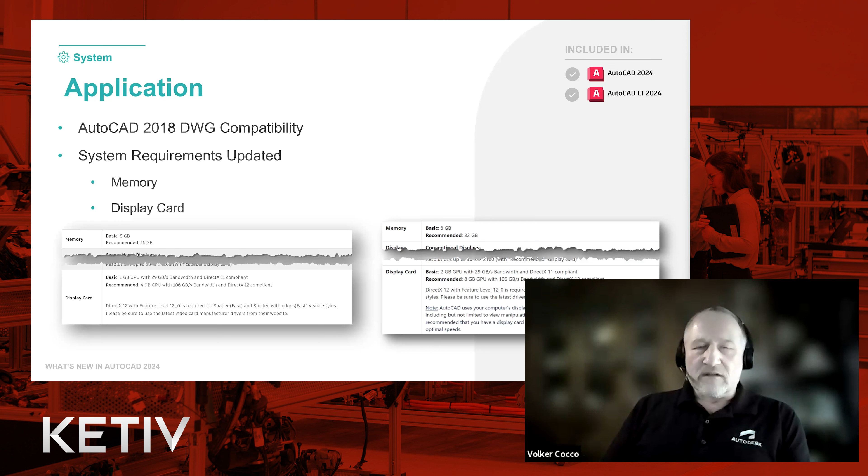We did make some changes to the system requirements. I'm not going to spend too much time going over the details, but I'd encourage you to take a look, as we've left the basics for memory the same, but we've upped the recommendations for memory to be more realistic and provide a better experience with AutoCAD. 8 gigabytes of memory is not that much, and realistically most customers have quite a bit more anyway.

The graphics recommendations have been upped as well, and I'd encourage you to take a look at that. One reason is many newer systems come with an integrated card, and many of those share 8 to 16 gigabytes of system RAM rather than VRAM. AutoCAD, your system, and other applications all have to make use of that memory. So we now put a blurb in the system requirements letting you know that if you have a discrete card on a system with dual cards, you should use that discrete card to power AutoCAD's graphics, since VRAM gives you optimal performance.

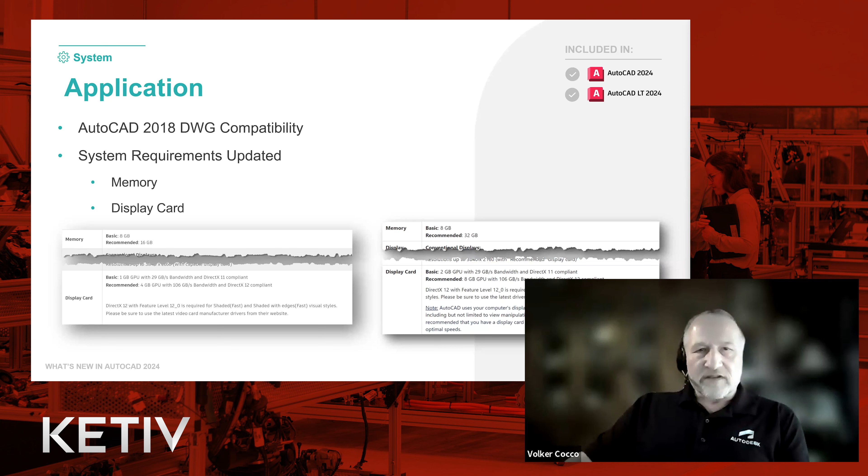Probably one of the biggest system changes is that the AutoCAD for Mac applications and AutoCAD LT now run and are supported on the M series chip. This provides a twofold improvement in performance. Be aware, though, results are going to vary based on the user, their experience, the machine operating system, filters in the drawing files, and even the source material. So performance is improved, but results may vary.

Another change you'll see is that the Autodesk desktop application was replaced back in mid-February by Autodesk Access. When you install AutoCAD, if you still have the desktop application installed, Autodesk Access will uninstall that desktop application, then install the Autodesk Access application.

Next, we've introduced AutoLisp in AutoCAD LT. So AutoCAD LT can now leverage the thousands of Lisp routines that have been written, which previously could only be used in AutoCAD and the tool sets. You should all be familiar with AutoLisp as far as the AutoCAD applications go.

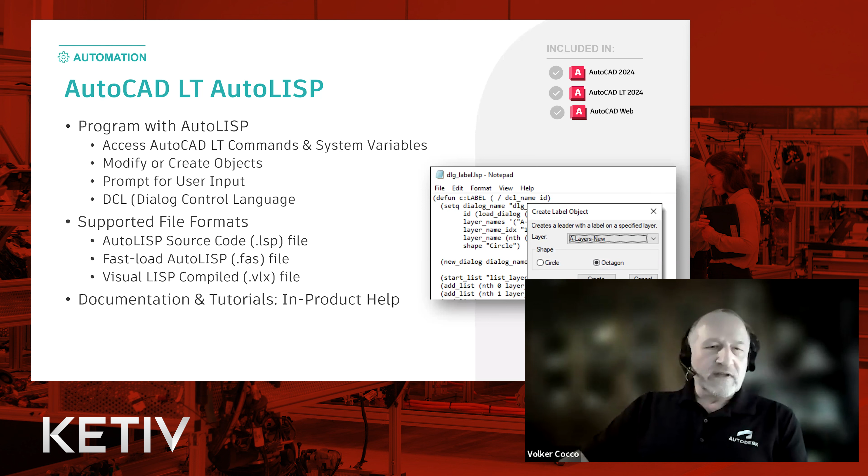There are limitations here. Also, LT on Mac OS does not yet support AutoLisp, and the integrated Visual Lisp editor is also not available in AutoCAD LT. Recently we replaced the old Visual Lisp IDE with the Visual Studio Code environment. Even though it's not integrated with LT, keep in mind you can install that if you want to write code or tweak existing code, and use that environment to do so.

And then you can still load those Lisp routines using the app load command, or through a batch file or acad.lsp file. This should make a lot of people happy, but we'll probably also see a lot of questions regarding AutoLisp as well.

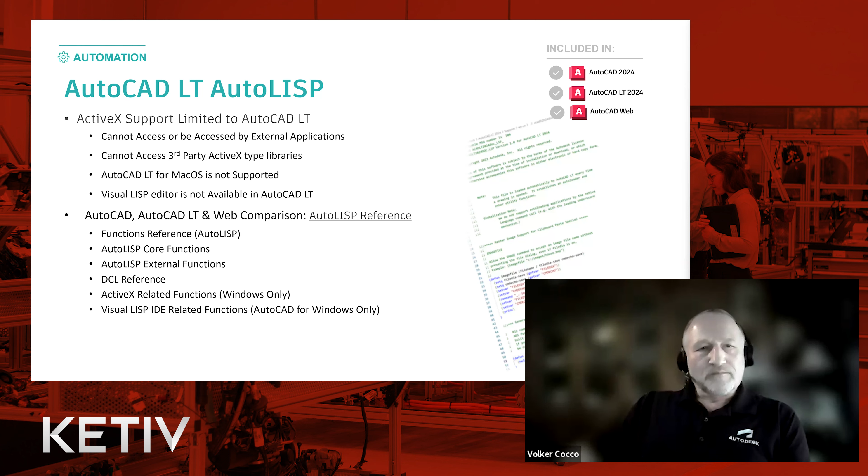Moving on, I'm going to talk about the big features that were introduced. The first few here are enhancements to existing features, and then I'm going to talk about new functionality. I'll go over all of this rather quickly so I can have time to demonstrate some of this functionality for you.

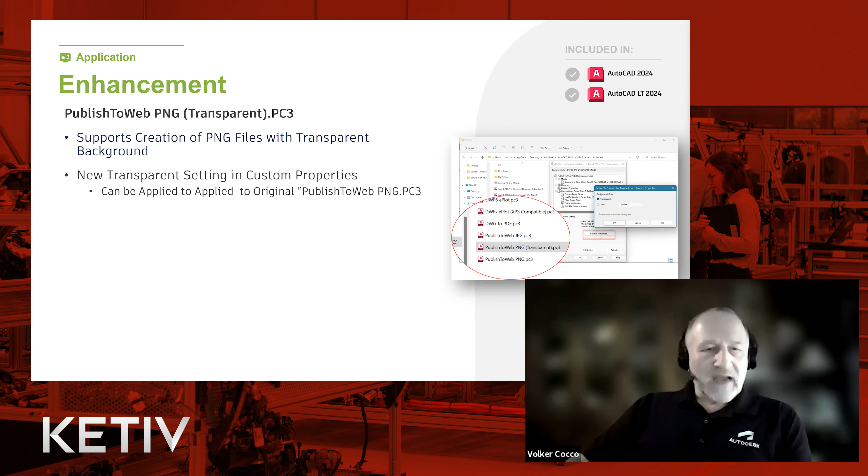First, let's take a look at some behind the scenes enhancements. AutoCAD 2024 adds a new plotter configuration file, the publish to web PNG transparent PC3 file. This supports creation of PNGs with transparent backgrounds, and this option is also included in the plotter configuration custom properties dialog. You could take the original publish to web PNG file and tweak it to do the same, rather than having a duplicate, but I'd encourage you to keep both - one for color background options, and one for transparency. This should make a lot of people happy. I was happy to see it, I can assure you.

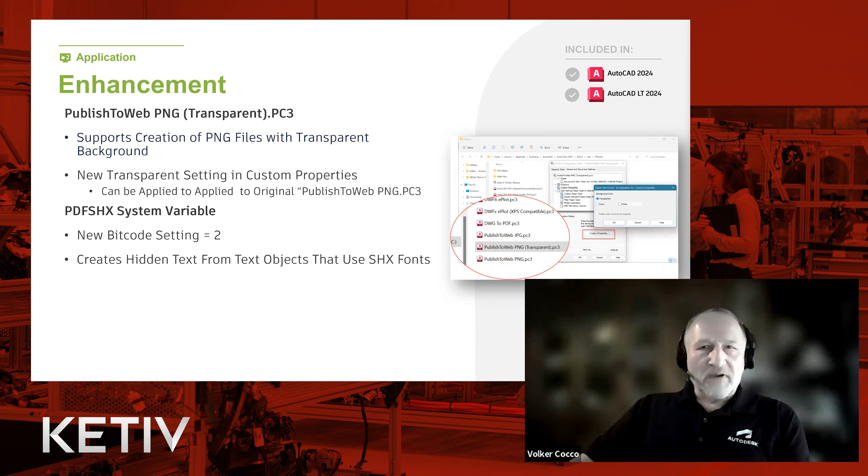Secondly, we've added a new bit code to the PDF SHX system variable. This allows us to store text objects that use shape-compiled fonts as hidden text when the drawing is exported to a PDF. This makes that text searchable and selectable in the PDF without introducing all the shape-compiled comments we've seen previously. So that should make a lot of people happy as well.

Now let's take a look at some enhancements to AutoCAD. We'll start off with trace, and the markup import and markup assist tool, which was introduced in the last release.

The trace environment continues to improve and now includes a new command called Copy From Trace, which copies objects from a trace into the drawing. There is no ribbon icon for this, or if somebody were to use the old style toolbars, no button for it - it's command line only.

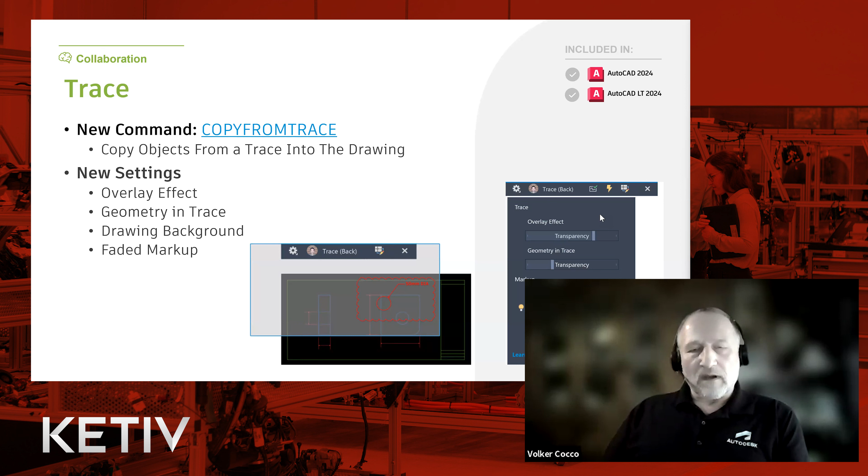We've also added some settings that were previously only available from system variables to the settings palette on the trace toolbar. You'll see the top two items, overlay effect and geometry in the trace, changing the transparency on those - these two are only available in trace. If you're in the markup assist environment, you'll see two additional transparency options for the drawing background itself, or to fade a markup.

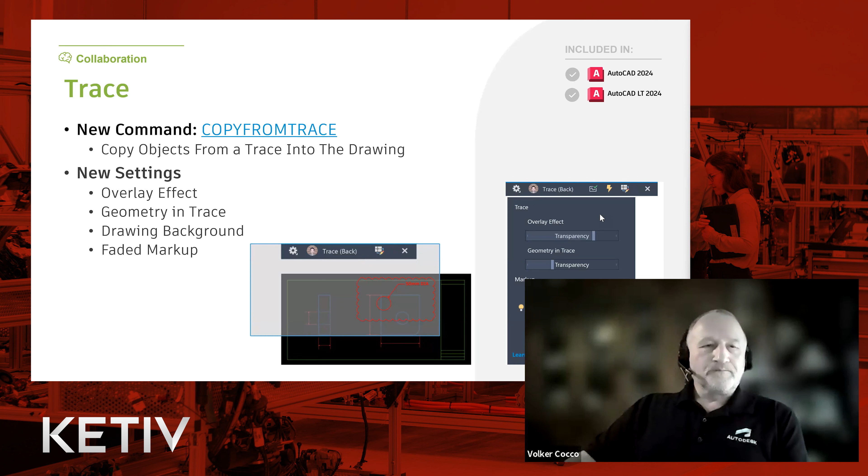Moving on to markup import and assist, since we were just talking about trace - the previous release of AutoCAD included this new markup import and markup assist functionality. It uses machine learning to identify markups and provide a way to view and insert those drawing revisions with less manual effort. Now this release includes some improvements that make it easier to work with those markups in your drawing.

Markup assist now recognizes strike-through or deletion markup, so any text that has a strike through over it, it recognizes what that is. PDF comments made in, say, Adobe Acrobat will also be brought in with the markup, and you can use the existing text in those comments if you choose to, as M-leader text, or just insert it as text.

We also have a tool called fade markup. This will allow you to fade any markups that you are done with or are unrecognized, allowing you to get them out of your field of vision.

We also have what we call instructional text - this is if you have something like 'remove' or 'erase' in the drawing. Instructional text supports the move command, the copy command, and the delete or erase command. So if you have anything similar to that, markup recognizes it. If you select, in this case, an image with 'remove' on it, it would execute the erase command in AutoCAD to allow you to quickly erase the objects within an assist boundary. It's a pretty cool feature.

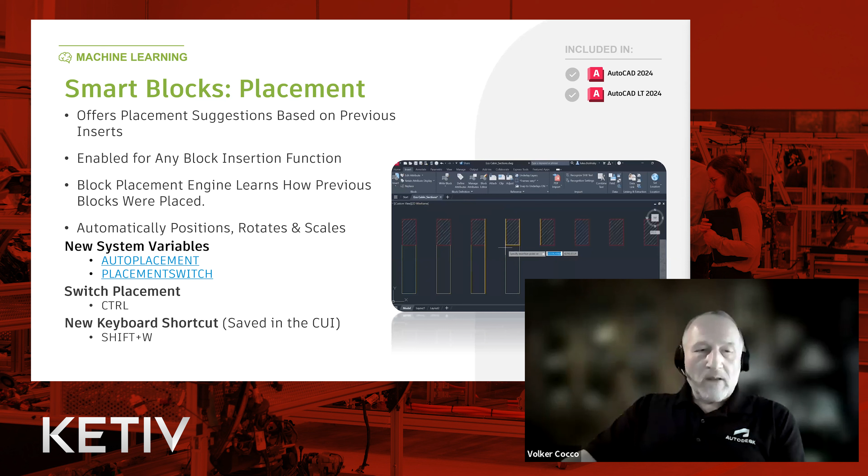And then if you want to manually check other options, you can use the control key. If you want to just disable it temporarily, you can use Shift plus W. You can also, of course, turn that off using the placement switch and auto placement system variables. And again, we'll see how this works in the demo.

There are some limitations, since it's all machine learning and it learns from existing insertions of the same block. Currently, properties are not included. So if you inserted the chair on the chair layer, but later you're working on the furniture layer and decide to insert the chair, it's going to use the furniture layer. That's just not supported at this time, but it is being worked on. No 3D support either at this time.

If you need to do some troubleshooting, a couple things: maybe you're having performance issues, try turning auto placement off. If auto placement isn't working for someone, try setting the bit code to 1 to enable it, since it may somehow have been switched off. But if you're going to send in a support case, please provide us with details, the block, as well as the drawing or at least the context of that drawing, a small portion of it. I know some people are a little finicky about sending their data, but a screen capture and more details help us troubleshoot better.

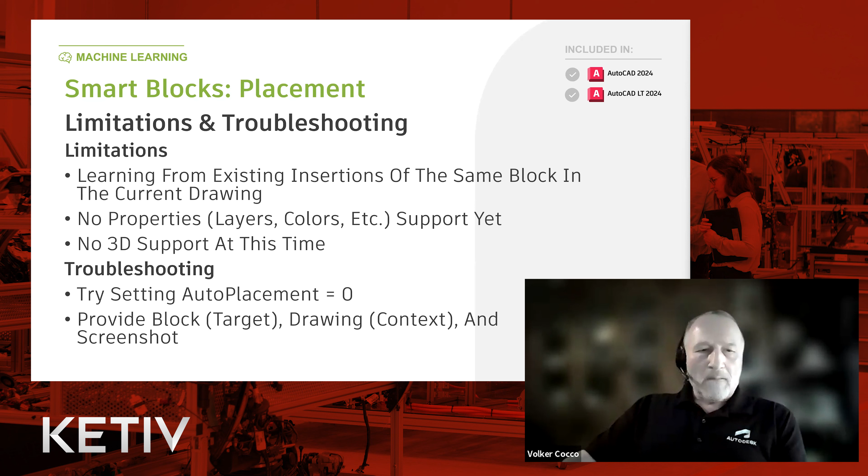Block replacement. This will allow you to specifically select one or multiple instances of blocks in the drawing, and then replace it with another block of the same type, either through a suggestion provided by the machine learning, or from a palette, or from your block library.

It suggests similar looking blocks to easily allow you to make that replacement. The blocks do have to exist in the drawing, or they need to be within a library drawing attached to your blocks palette.

So when you use the block replace function, any blocks that are replaced will also include the scale of that block, the rotation, and attribute values. They're all going to be maintained from the original block. Again, this is based on machine learning, and as you work with AutoCAD, the suggestions are going to improve.

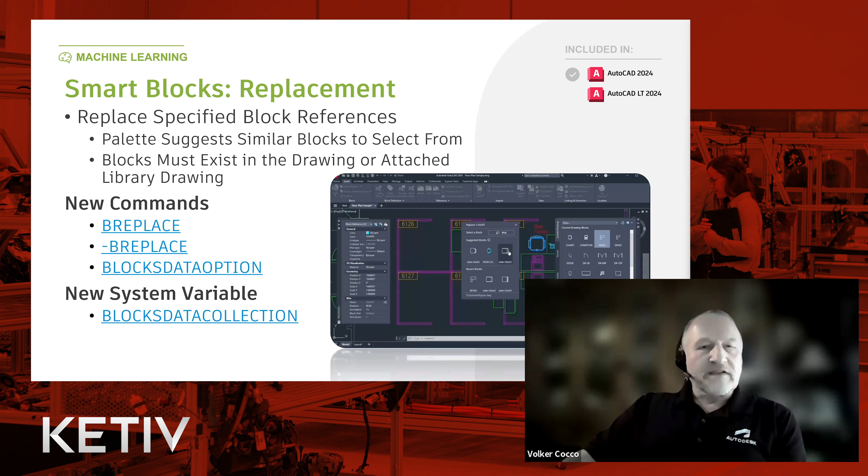With this block replacement functionality, you will find the command on the properties palette. You can use the BREPLACE command. Again, you can select one or multiple instances of a block, and it does inherit those attributes if it has any.

There's minimal support for dynamic blocks. By that, it's going to use the default shape of the dynamic block, whatever the display value of the original dynamic block was, that's what it's going to use. And then it suggests blocks, as I said, from whatever has been used in the drawing.

There are some limitations. Again, you do need to have a block library attached to the block palette, and the machine learning, what it's looking at may not always make sense. For example, I'll use the chair example again. Maybe there's a toilet being used in the drawing as well, and it may infer that it should suggest you use this block, which is a toilet, which you obviously don't want as a chair, or maybe a sofa, something like that. It may not always give the appropriate recommendation, but as it moves forward, it does learn.

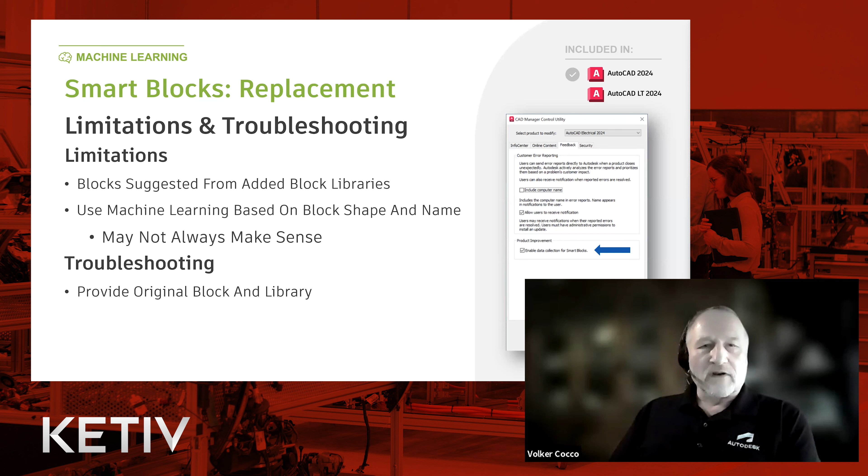The last topic before going into demos is activity insights. We introduced insights, my insights, back in 2022.1, I think it was, which allows us to give customers information about their use of AutoCAD.

With this release, Activity Insights will track events that you use when working on your drawings. For example, if I start a new drawing and give it a name, it's going to track that event. If I make some modifications to it, or someone else does, it will track that as well. I'll talk more about it momentarily, but basically it's a way for drafters and administrators to stay informed of any relevant changes to a file.

It requires minimal setup. Basically, when you first launch AutoCAD, it prompts you to specify a location for activity events. These can be on a LAN, they can be local—local is the default, in fact—or on a cloud server. These activity logs are nothing more than small JSON text files, so they take up minimal space, and any user working on the same drawing, their events will be tracked. It's a great way of keeping track of what's happening with your AutoCAD drawing file. This not only works in AutoCAD, but in the tool sets as well as Civil 3D.

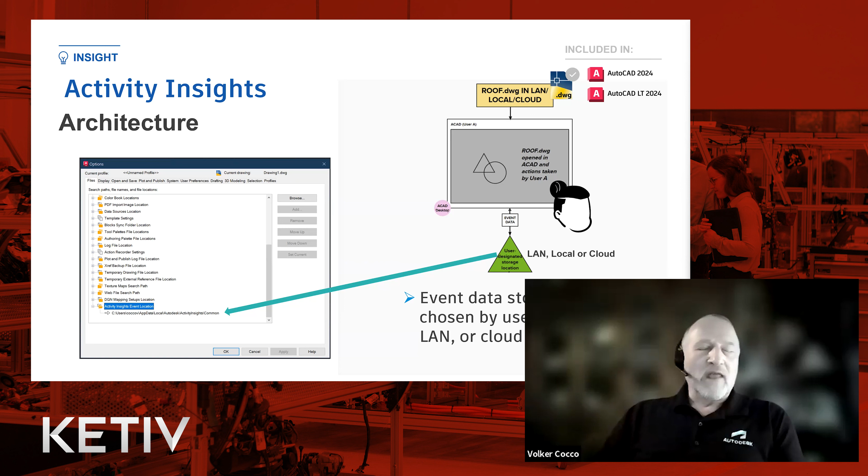Again, users are prompted initially when they launch AutoCAD to specify the location. So putting this on a server, cloud, or LAN, multiple users would then be tracked whenever working on that particular drawing. Once a location has been specified, again, those users would be able to also add their activities to that event. It's pretty simple. It's very straightforward to set up. It doesn't take much at all.

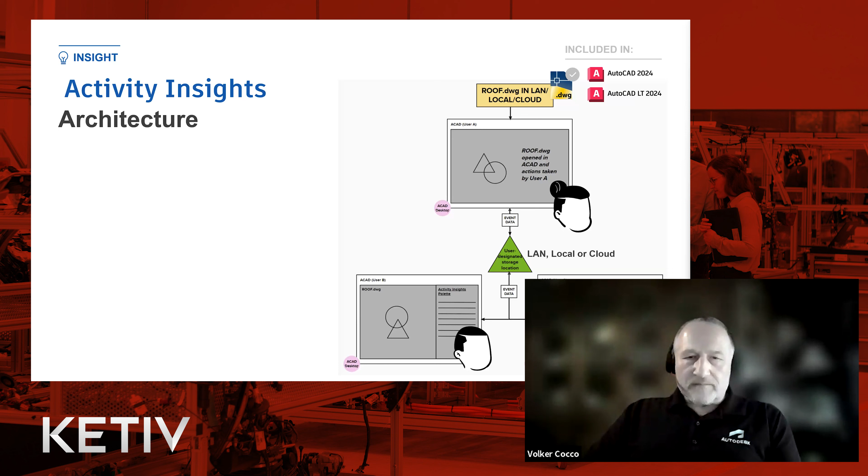Let's move on and do some demos. I'm pretty sure that's going to make you a little happier than me just talking about all this stuff.

So in this particular drawing, I have a couple of traces that we aren't going to see a bubble for because I've opened this up, obviously, and worked in this drawing. And let's take a look at the first trace here.

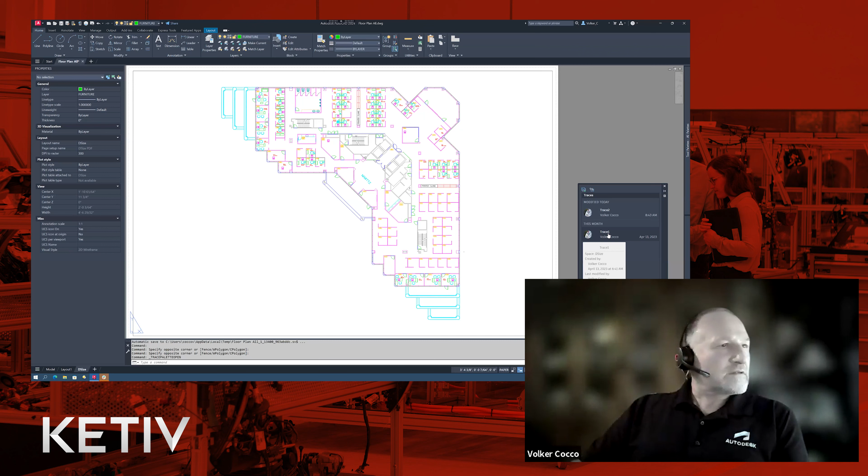And you'll see that I'm in the wrong drawing, which is unfortunate. I'll talk about that. Let's see if we have this here. Yeah, yeah, I opened up the drawing. Okay, one awkward moment so far.

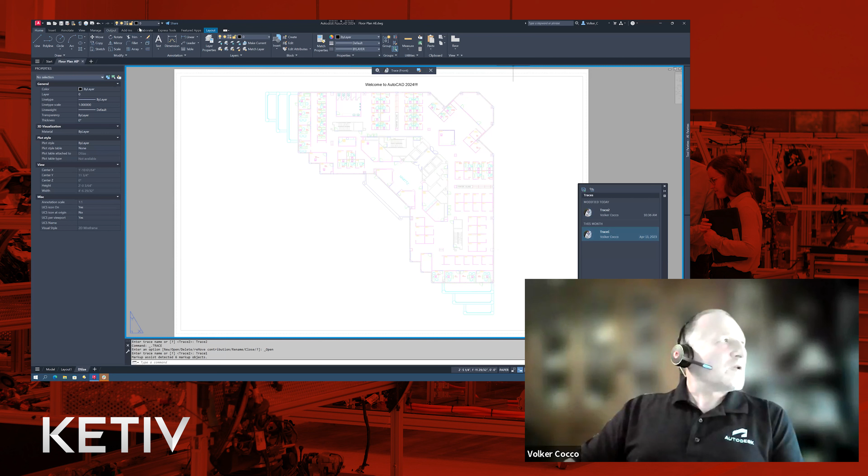Here it is. All right, we'll talk about the trace itself a little later, but we're in the trace environment where we see our traces, and this is called trace front. What I'm going to do is go into markups, and we'll just turn this around a little bit. Go into markups and import a markup and show you how cool that is nowadays.

So I'm loading this up. That part hasn't changed much at all. And as I bring the markup in, it is a lot. The alignment of everything is quite a bit better, accurate as far as if I were to see any kind of boundaries here or line work for walls, it would be aligned a lot more accurately.

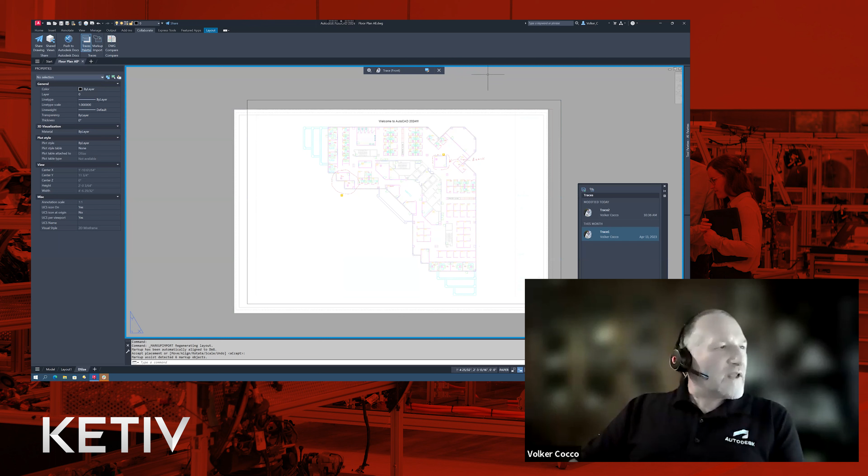But that's not really where I want to go with all this. We're going to start over here and take a look. So first of all, I'm going to go into the editing environment for the markups. And what we have here, this icon, is if I select it, you'll see this is a comment added in Adobe PDF. And as I imported this, it also imported the comment, and it allows me to insert this as an M leader, insert as M text.

I can update existing text nowadays and fade the markup itself. Right now, I'm just going to go ahead and fade it because it's just giving me some information that I'm going to use, and you'll see it's out of sight, out of mind. I didn't really need that. Now, what we have over here is some text saying, hey, you need to remove all of this within this boundary. And I'm going to go ahead and click on that. And if you note, it may be easier on the command line where it says, I'm now in the erase command. And erase select objects.

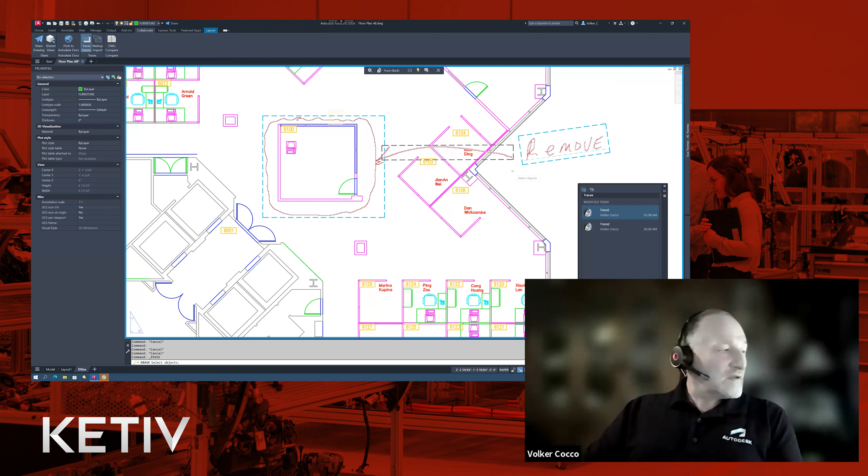I do have the little tooltip, which is kind of small. So what I'm going to do is select this boundary here for the assist, and as I select it...

Awkward moment. Oh, you know what? Very awkward moment. I'm in paper space. All this stuff is in model space. So this is very awkward. How many times have I done this? Oh well, I'm all about the entertainment for you people. So what I'm going to do is just double click here, and I've now made the viewport active.

And now I'll go ahead, I'm still in that markup assist. As I select the boundary, everything within the boundary is now selectable. So I right click and it erases everything in there, and it fades this particular markup right here, the instructional text. It does still have, it didn't know what to do with this. I didn't really tell it to do anything.

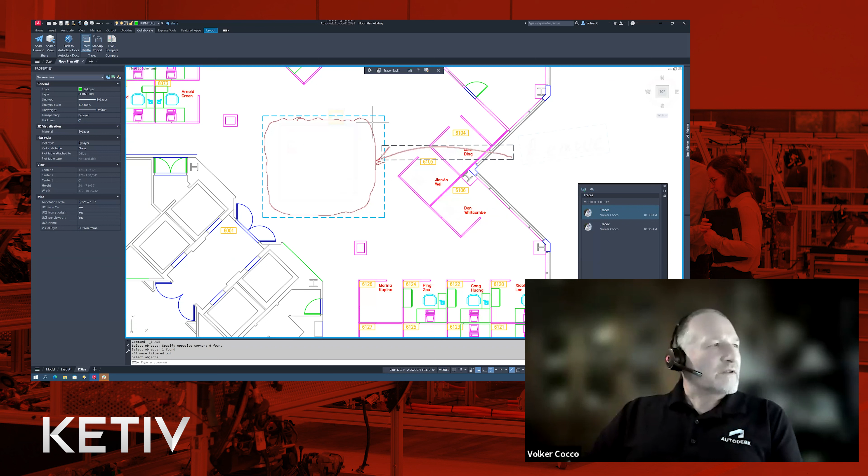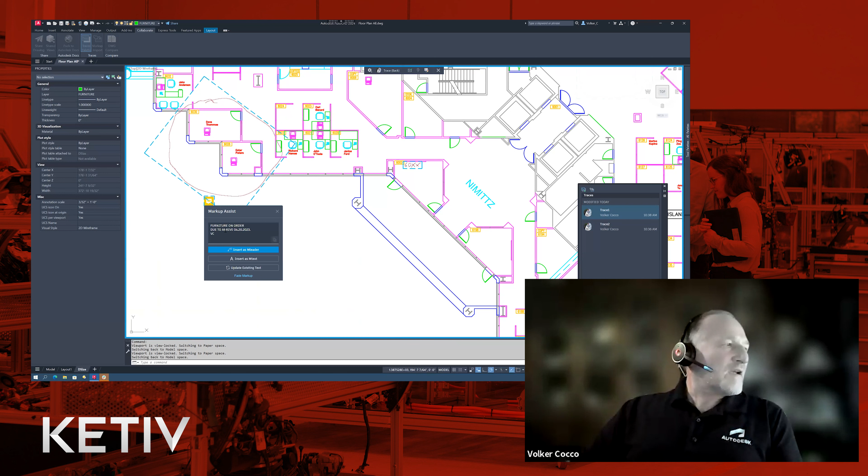So what I'm going to do is go up here, select fade, and select that. I could also select it like this, and it has gotten this out of the way. I don't need those markups anymore. Coming down here, I have another, okay, it's telling me the furniture is on order, so I really don't need to do anything with this.

I'm going to go ahead and fade that markup, and we've seen this in the original release, insert as Rev Cloud. So I'm just going to do that.

And here we have some text. What's going on here? So I need to change this to 60XX. So I want to point out this block has an attribute. That's an attribute value we're seeing there. I'm going to go ahead and select the markup.

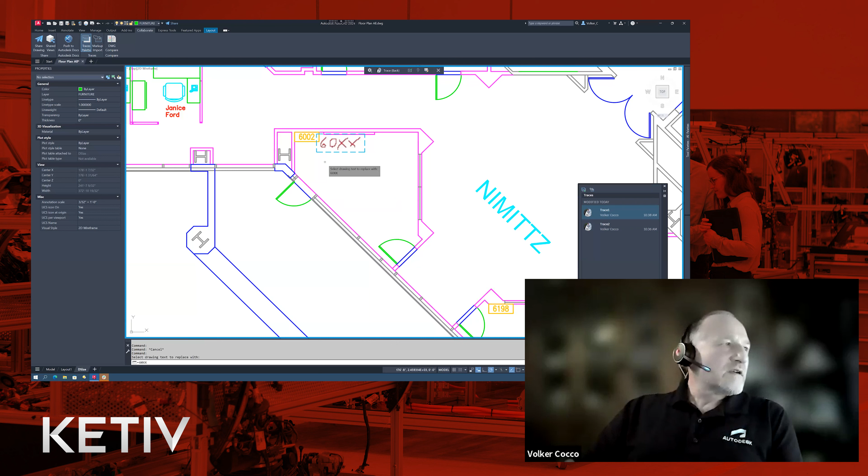I'm going to update the existing text. I'll select, scooch in here so you can see it better. I'm going to go ahead and select the text and tell it to replace. Whoops, didn't want to do that. And so now it's updated that text and faded out the markup. So pretty cool stuff there.

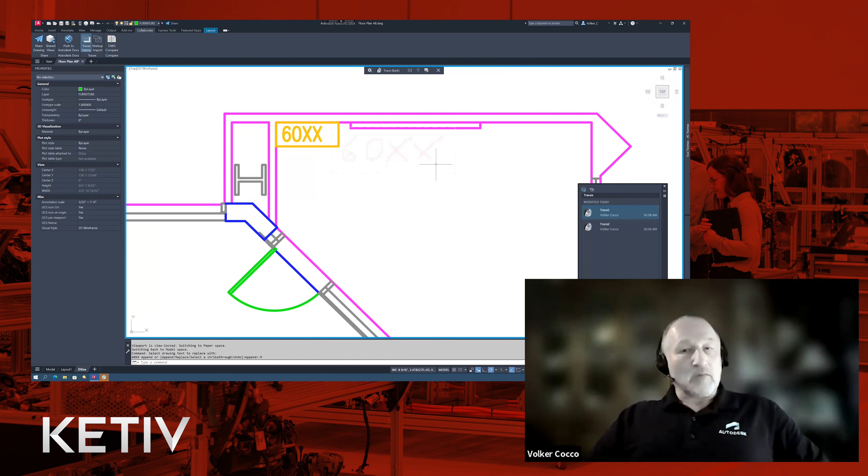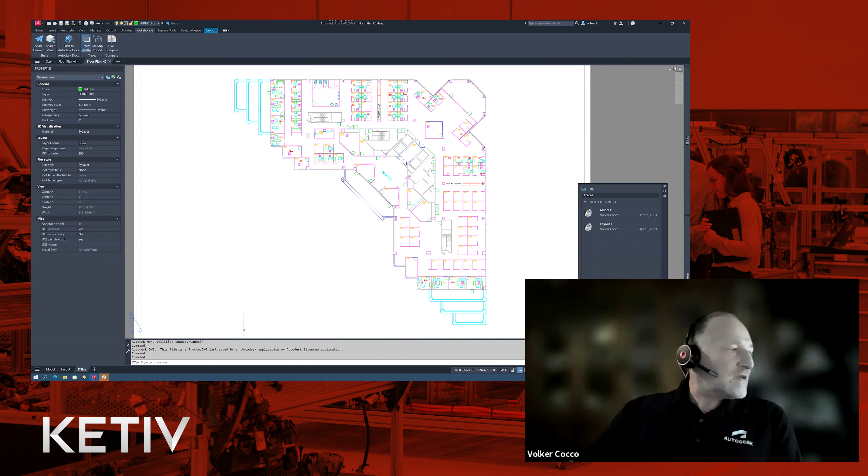Let's switch over to the model layout and talk a little bit about the block functionality that we have. I'll talk first about block replace.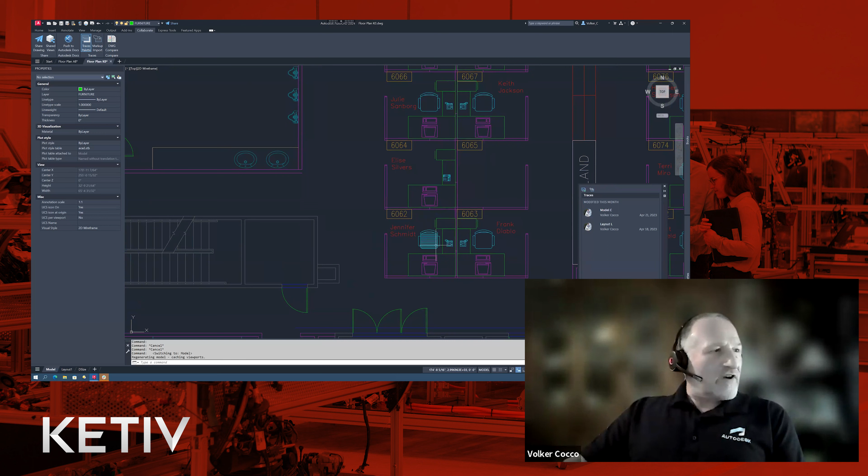And here we have a chair here that I need to make all the rest of these, or maybe just some of them, need to replace it. And what I'm going to do is, what am I doing? Yeah, I'm going to replace.

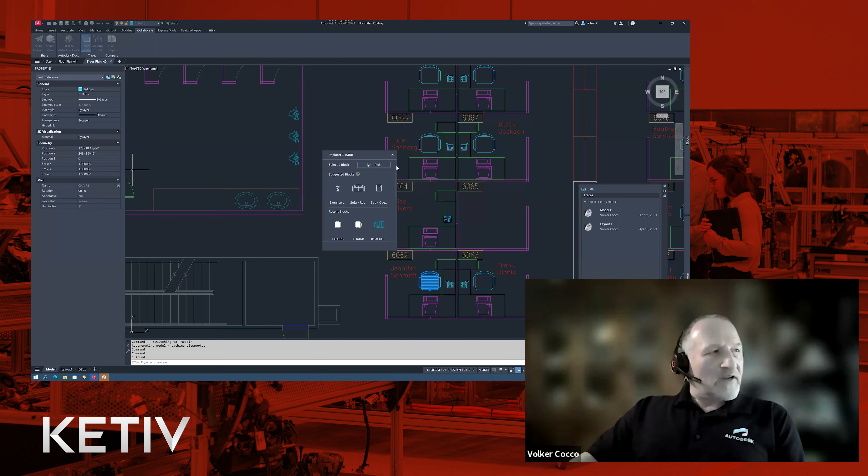So I'm selecting this block here, and I'm going to go ahead and show you the palette that pops up, which allows me to pick a block that I want to use to replace. And I just had another awkward moment because basically...

I need to do it this way. Go ahead and select these chairs. I want to replace all those. Chair 7, there we go. Much better, more better. And it shows me the blocks it's suggesting.

And this is what I mean by, be aware it's not always going to be right on as to a good suggestion. I really don't want to put a couch in here. I want it to look like this chair. I could pick that, but it's also telling me that, okay, here's a suggestion for that. And I don't need to refine this chair. Redefine it, and it updates those.

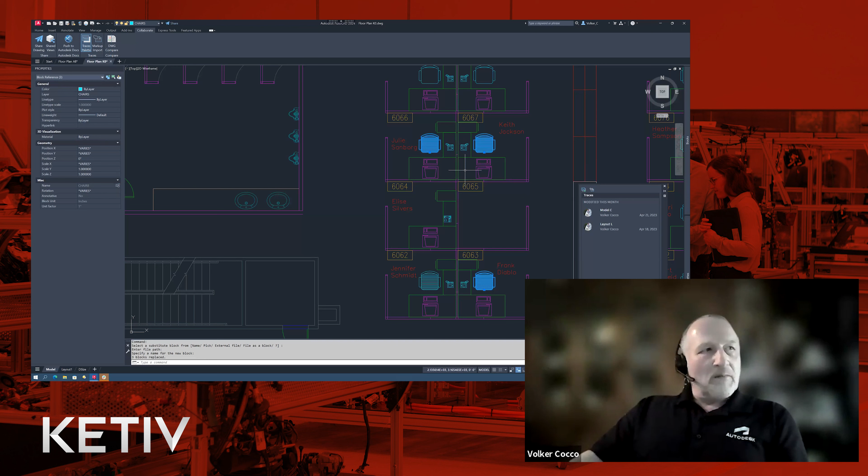So yes, we have a similar tool on the tool palettes, but this is designed to be used within the current drawing to specifically just work on those objects you already have.

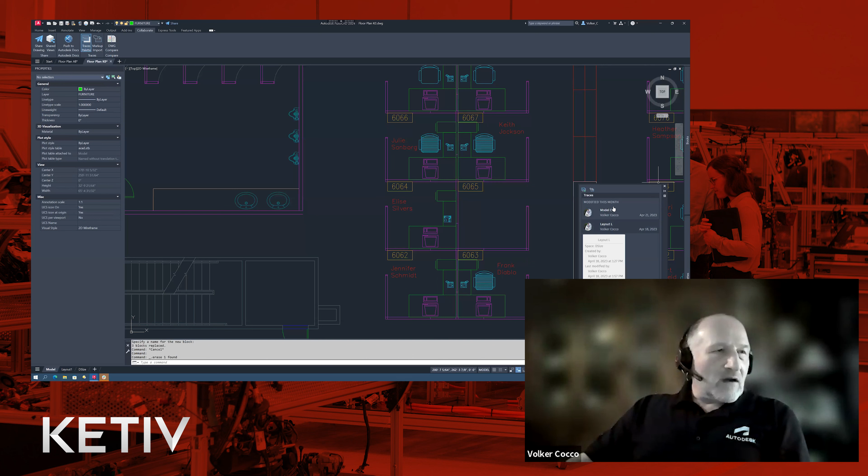So what I wanted to show you, because this is my second, I'm going to backtrack here. I believe it's this one that I made the change for, is that in the trace environment, oops, I guess it wasn't right there, and that's okay. Add chair 8 and update all chairs in this section. So again, we're in a trace environment.

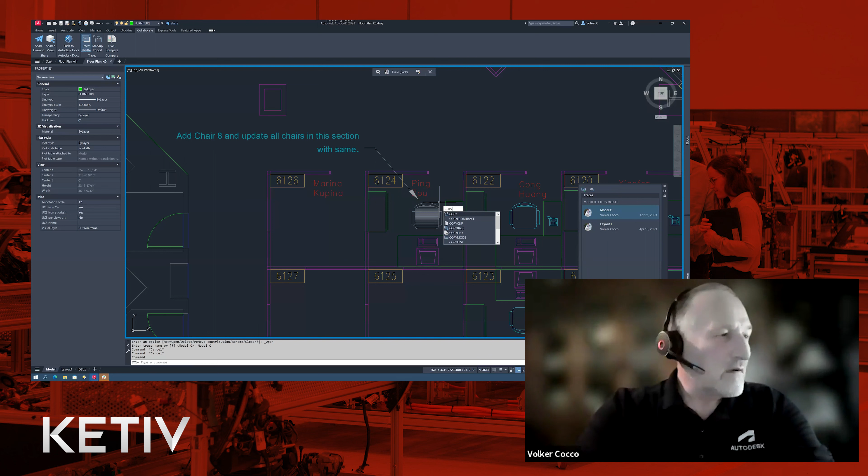I'm going to go ahead and switch over to where I'm in trace edit, and I'm going to go ahead and use copy from trace. I'll select this chair, enter, and of course I'm not on a specific layer here for that, but I've quickly added the object because I'm thinking, hey, why should I go somewhere else for this chair?

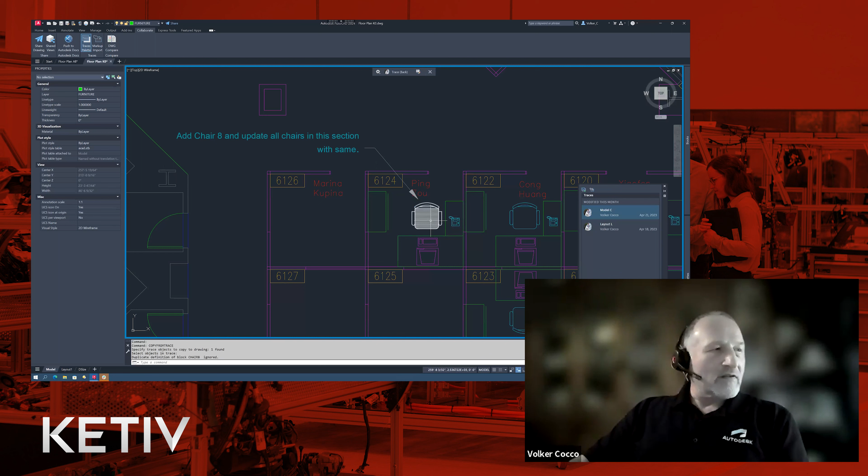They've already put it in the trace. They could have added it to the drawing themselves. I'm being lazy, I'm just going to use what's already been created and add it to this drawing. Probably want to change the properties here, but this is really neat functionality to just add stuff to the drawing.

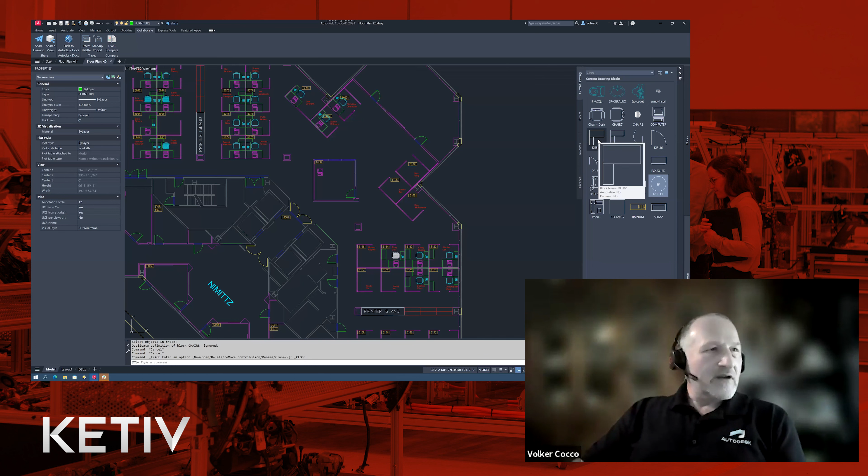Speaking of adding, let's close the trace palette and go over to our blocks here. I have the block library attached, and I'm going to insert some desks. I'm on the furniture layer, so let's zoom in. You'll see as I bring the desk near an object, it starts orienting it based on the angle of the wall. I'm in auto placement mode, so let's say I'm down here and it does this.

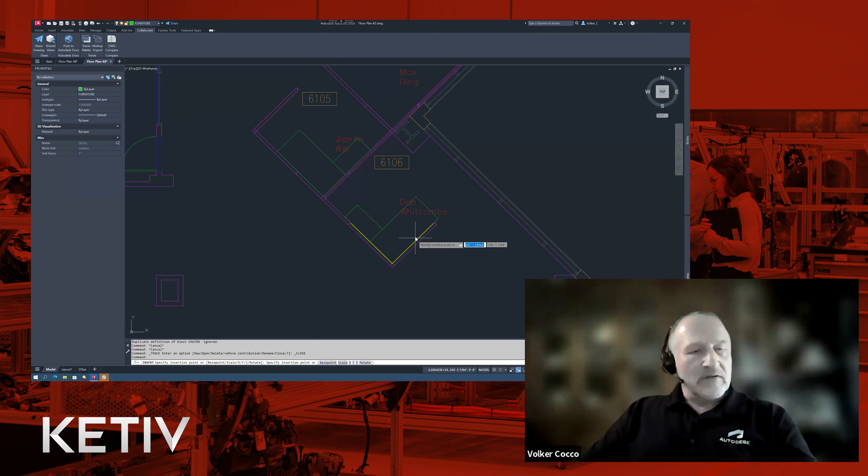I may want to use the control key to toggle through the various line work that is there. And if I don't decide any of those work for me, I'll use auto placement. Probably not how I would have wanted to place this with the door right there, but since I'm having all kinds of awkward moments, I'll go with that.

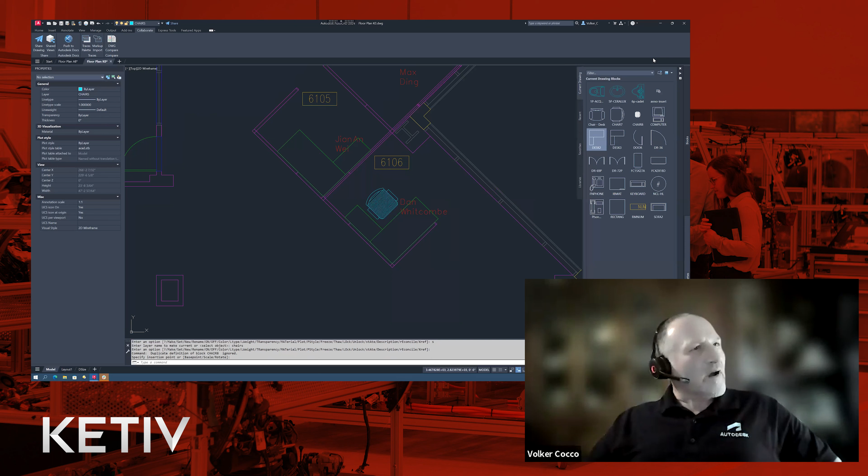I can also insert using my tool palette or any other method really, if that block's already in the drawing. As you can see, it is aligning that chair. Obviously from the tool palette I didn't have the repeat block function, but that's okay. This is pretty cool stuff. Back in the day when I was drafting, I'd have Lisp routines and such to automate this kind of stuff, but you had to have a specific angle. Here, it's doing the thinking for you.

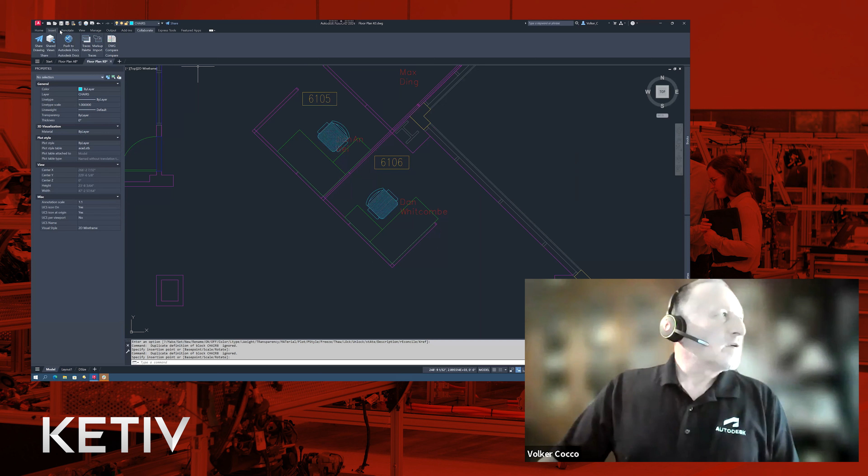Going to the View tab, I'm going to click on this Activity Insights. And while I've been doing all this work, let me save the drawing here. My work has been tracked from Activity Insights, and you can see back here on April 12th, I saved this to a different drawing name.

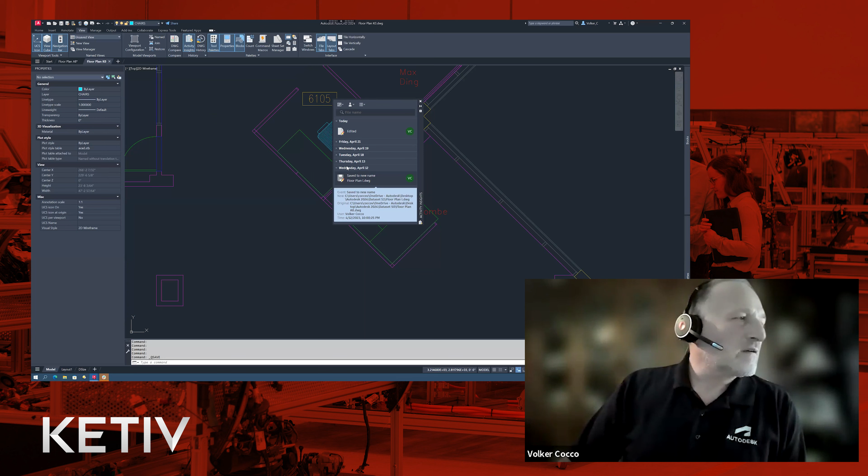It shows me what the original name was of the drawing in the tooltip there, and what it is now, and who did it. It doesn't track individual events like adding a line or a block at this time, but it lets me know that so-and-so modified this drawing on this particular date. Here, you'll see this is an unknown user, file renamed. The reason you're seeing this is because the drawing was renamed through Windows File Explorer - outside of AutoCAD - but it knows it was renamed, and again gives you the information of the old name and the new name.

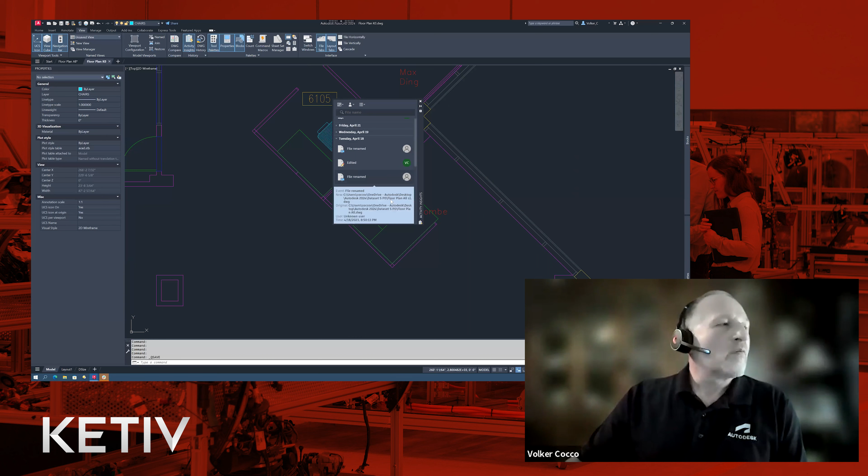I published this to a PDF at one point, and it lets me know that it was me who did it. Good thing, because I forgot what layout was published and to what location.

Hey, Volker, yeah. I don't mean to interrupt, but I think that is my new favorite feature right there, being able to see that it was renamed in Windows.

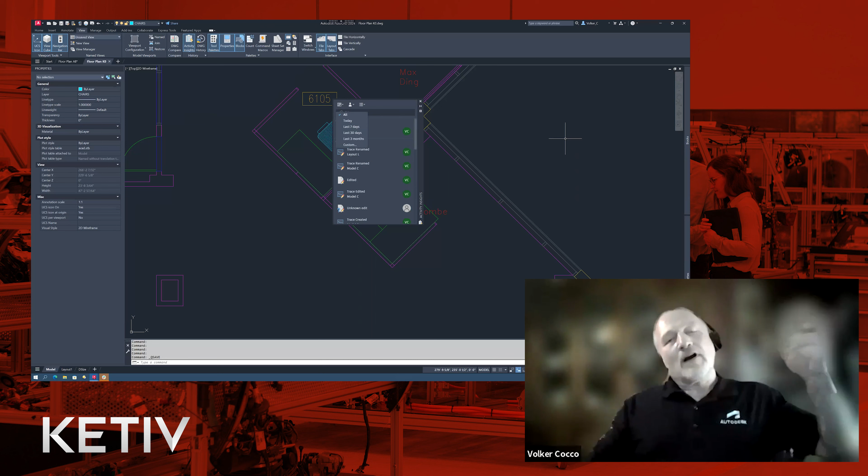I'm good with you interrupting. This is very cool stuff, and it's only going to get better too. We've got some great options here to filter by the different events, filter by who modified it, and also filter by date. So, hey, I had a few awkward moments here, but in my opinion, I'm loving some of these new features that we've introduced.

And yeah, it looks like good - I left enough time for some Q&A on this. Yeah, I think it's pretty exciting stuff, some of this. That last one blows my mind.

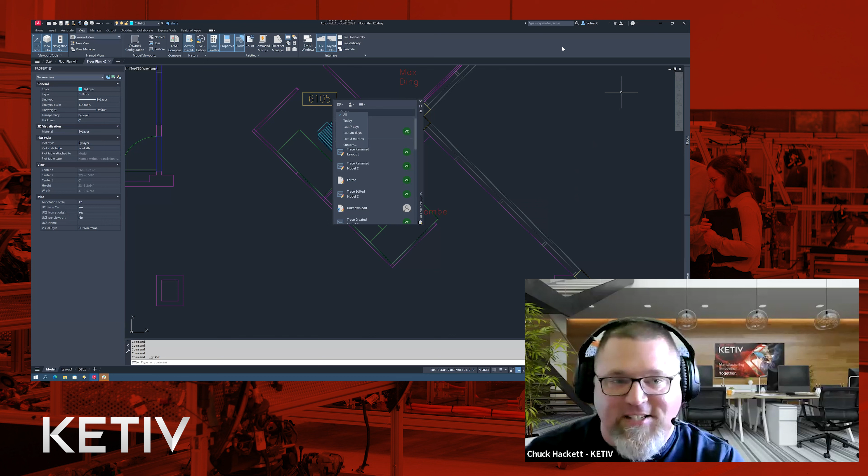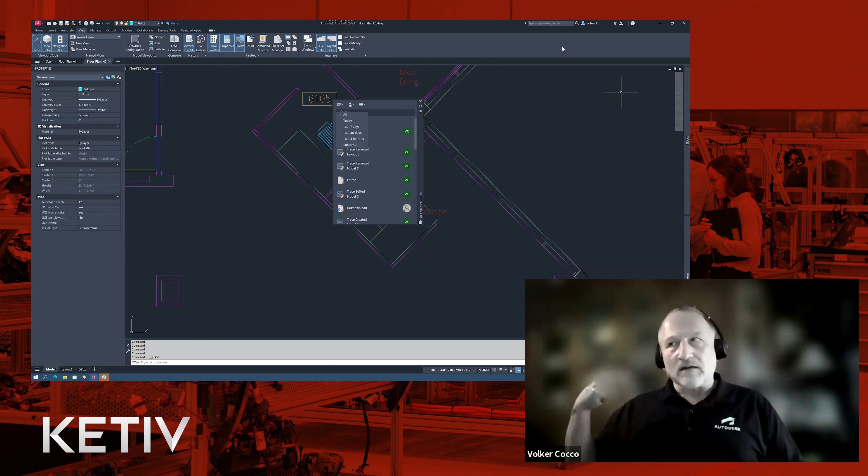I like being able to see that someone that was not an AutoCAD user renamed it. And yeah, it'd be nice if it picked up the Windows username or something, but who knows, maybe in the future. This is the first implementation of this. The nice thing is it's not just in AutoCAD - it's in AutoCAD toolsets as well as Civil 3D.

Hey, so while you were talking about the new Autodesk application for signing in and updates and whatnot, you made the statement that administrators can disable the updates. So my question to you is, if an administrator desires to disable those updates - well, I guess it's not really a question - but they can either contact Autodesk, or if they are one of our support customers, they can contact us and we can provide documentation on how the administrator can disable those automatic updates.

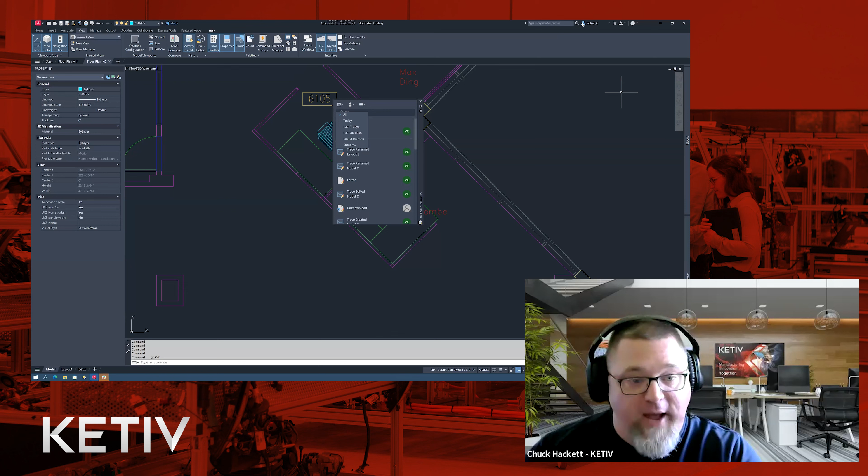Actually, I'm glad you brought that up. I probably should have finished up with my slide deck as well. All right.

So let me just put you on hold for a moment.

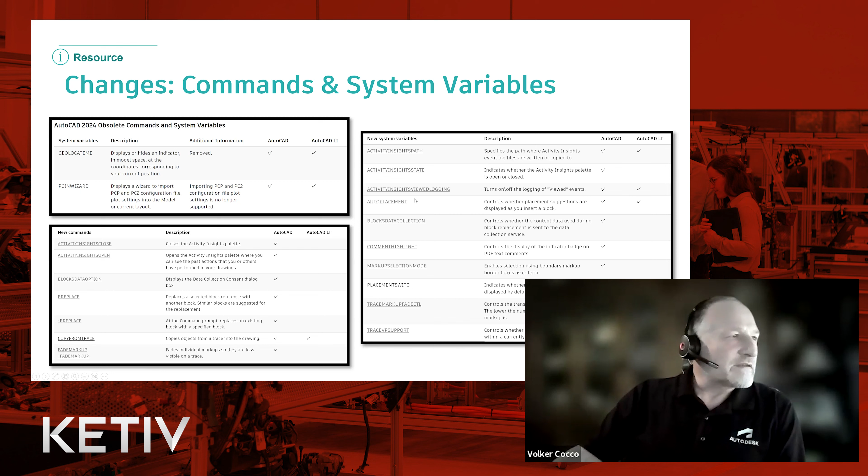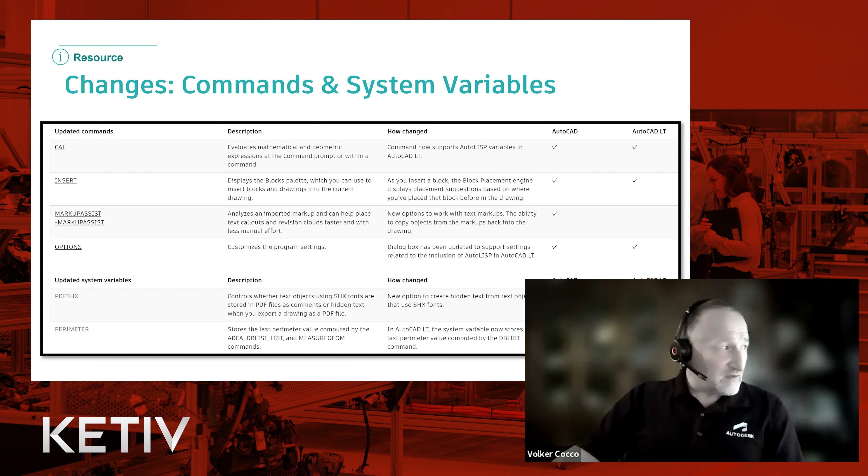So we have some reference sections here, and these are just images, so they aren't hyperlinked, but you can go to the help documentation to find the links. They're all alphabetized and sectioned just like you're seeing here. I've put in these quick references so you know which commands have changed, which no longer exist, and which are new, as well as system variables.

And then, of course, here's the new commands and system variable reference.